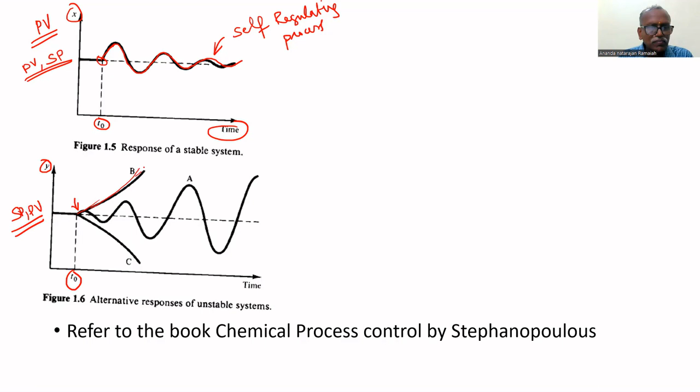On the other hand, here also the process variable is y. Here also the set point and PV are together initially up to T naught. At T naught, some disturbance is entering into the process. That's why process B completely deviates. It doesn't come back. The process variable monotonically increases after the disturbance. Process C monotonically decreases as soon as the disturbance entered into the process.

The third one is process A. Because of the disturbance at T naught, its amplitude becomes oscillatory and it becomes an unbounded oscillation. Its magnitude goes on increasing. But all the three cases are unstable processes. It never returns to its original state.

Here, the self-regulating process is like a Tanjore doll. If you tilt that doll, again it comes to vertical position automatically. Like that, for any disturbance, the process comes to its original state after some time. That is called the self-regulating process. If a process is self-regulating, then there is no need to have any controller.

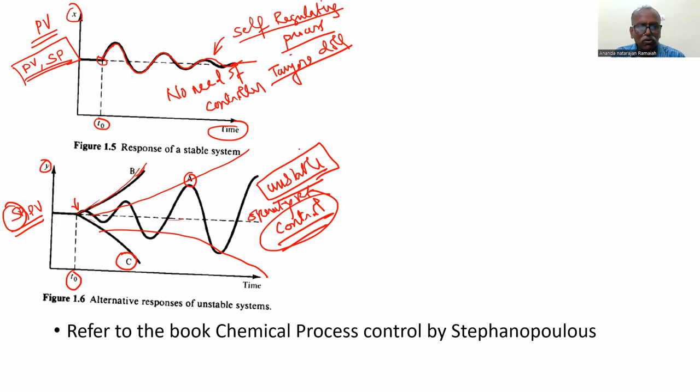But on the other hand, if for any disturbance it becomes unstable, you need a controller to bring back the process to its stable operating point. This dotted line is the operating point. To bring back the process to its operating point, you need a controller. That is the need for controller. This is the second case.

The third case is this. It is a CSTR, continuously stirred tank reactor. In that CSTR, it is an exothermic process. The feed is entering at a flow rate of F. That is the reactant entering the process at an inlet temperature of Ti. Its inlet concentration is C suffix AI. It is an exothermic process. The reactant will react here. Because of that, it will generate heat.

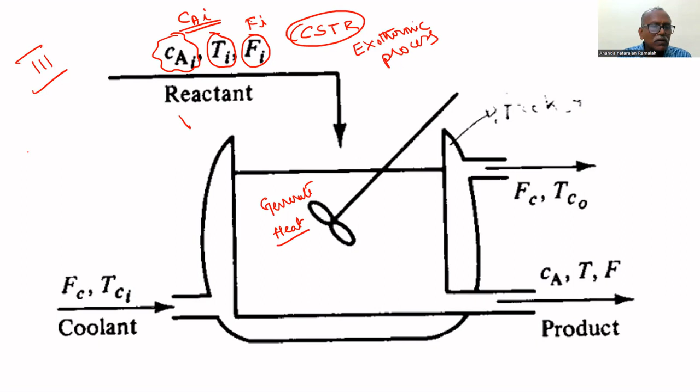I think you know, heat is different from temperature. Heat is energy. It is in joules or watt second, whatever. Temperature is a gradient of energy. For a fixed amount of mass, if temperature increases, the energy content increases. It is a gradient. In electrical analogy, it's identical to voltage.

So it generates heat energy that has to be removed. It is like in a car, the engine generates heat. It has to be removed. That's why we are having a radiator. Initially the car is at cold temperature. As you ride the car, the temperature gradually increases and it becomes steady. It means the amount of heat generated by the engine is equal to the amount of heat removed by the radiator.

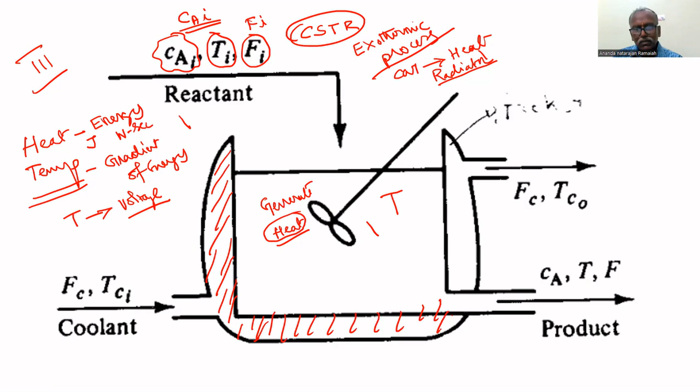This is the jacket around the reactor. A coolant is used. A typical coolant is cold water that is entering at the flow rate of Fc. Its inlet temperature is Tci, and it is leaving here at the same flow rate Fc, and it takes away the heat. That's why its temperature is increased to Tco.

As it removes the heat from the process, the process temperature is maintained at T. That's why the process liquid, the finished product, is leaving the CSTR at the temperature of T with a flow rate of F with a concentration of Ca. So this is the description of the process.

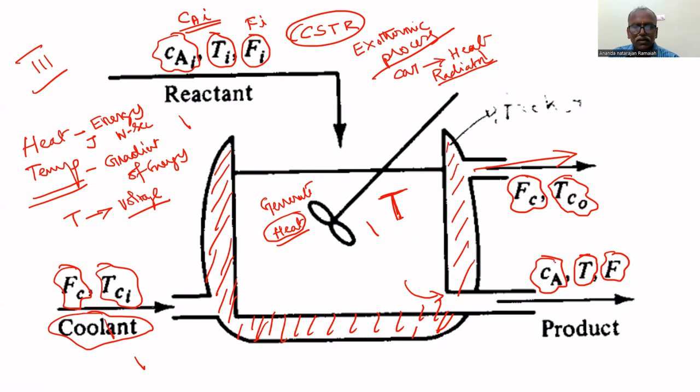The product is available at the bottom. Reactant is entering in the top. Heat is removed by the coolant. A stirrer is used to keep the temperature uniform around the entire CSTR. This is the stirrer. That's all. This is the process.

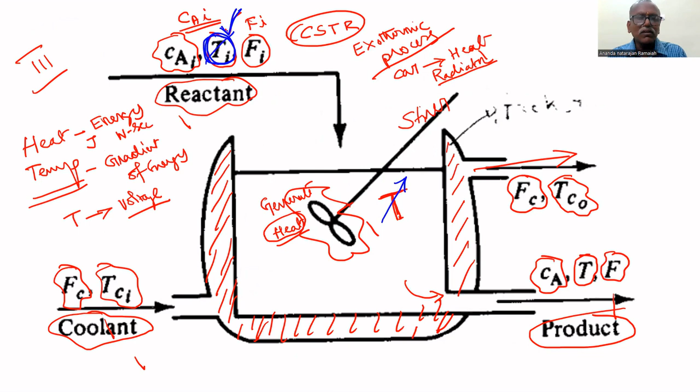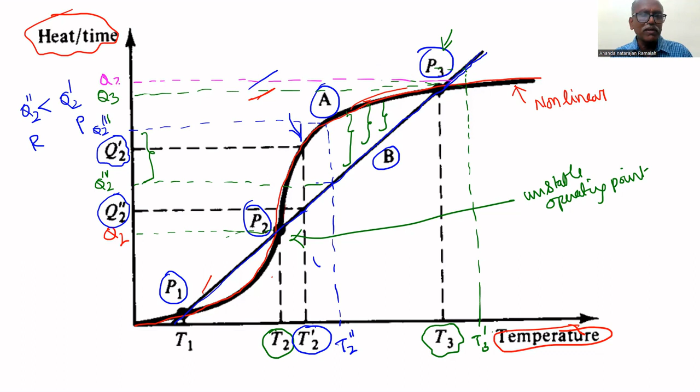That time, the amount of heat generated by the process is Q3 dash. Amount of heat produced by the process is Q3 dash. Amount of heat removed by the coolant is Q3 double dash. Here, Q3 dash is less than Q3 double dash. Produced is lesser, removal is more. That's why the temperature will decrease and come to again P3. It forces the process towards operating point P3. That is called self-regulating.

Self-regulating operating point. It regulates itself. If any increase, it decreases. What will happen if Ti decreases at that point? There will be a decrease in temperature, that is T3 double dash. If temperature decreases, the produced heat is higher, removed heat is lesser. That's why there will be increase in temperature and it goes to P3.

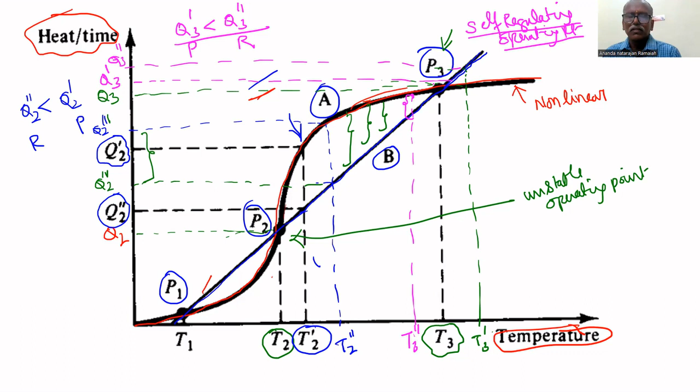If it comes to the left-hand side, it will be forced to the right-hand side. If it goes to the right-hand side, it is forced to come to the left-hand side. That's why this operating point P3 is called self-regulating operating point. It remains at P3. The process regulates itself. We'll check in the other way. Initially it is at the operating point P2. The temperature is T2. That time, the amount of heat produced by the process is Q2.

That time, there is a decrease in Ti. That's why the process temperature will decrease to T2 double dash. What happens? There is a huge difference in heat generated and removal. Removal is higher than generated. That's why there will be a further decrease in temperature till it reaches P1. At P1, again, the amount of heat generated is equal to amount of heat removed.

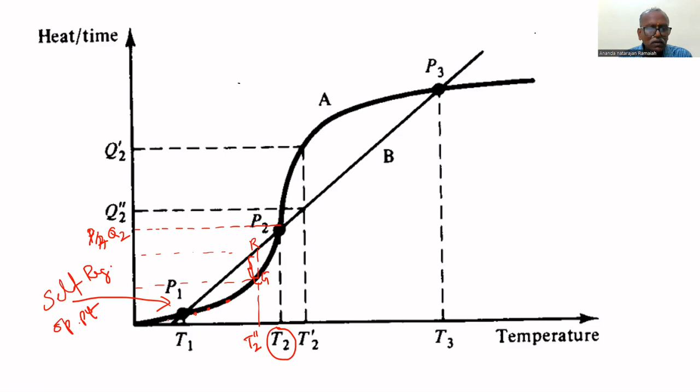For any decrease in inlet temperature, its temperature will fall and automatically it comes to P1 and remains at P1. Here, P1 is also a self-regulating operating point. What happens here? Let us assume that at P1 there is a slight further decrease in inlet temperature. There will be a decrease in temperature. But the amount of heat produced is higher and the amount of heat removal is lesser. That's why the temperature will increase and go to P1.

On the other hand, if any increase in Ti, the temperature of the process becomes T1 dash. Here you notice that the amount of heat removal is higher, generated heat is less. That's why its temperature will decrease and come to P1. If it moves to the right, it is forced to the left side. If it goes to the left, it will be forced to the right. Therefore, P1 is the self-regulating operating point.

So we can say this way. If we try to operate at P2, for any disturbance entered into the process, it will either go to P3 or go to P1, depending upon the disturbance. It never stays at P2. That's why P2 is the unstable operating point.

But if you operate at P1 or P3, there is no need of a controller because it is a self-regulating process. But if you operate at P1, it's at less temperature. That's why the production yield will be very less. That's why it is not economical.

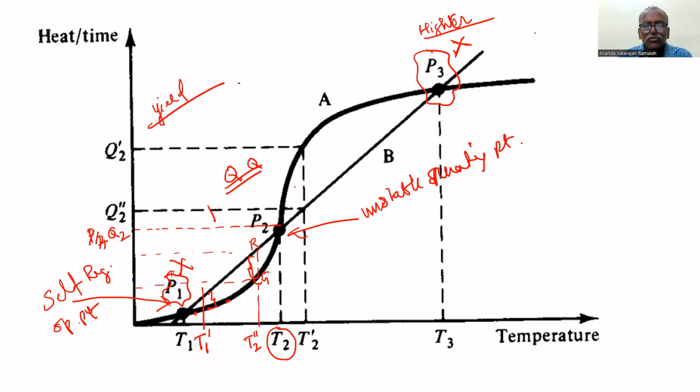But if any disturbance enters, P2 drives to P1 or P3. That's why we need a controller. We need a controller to keep the process variable at T2. That's why a controller is required.

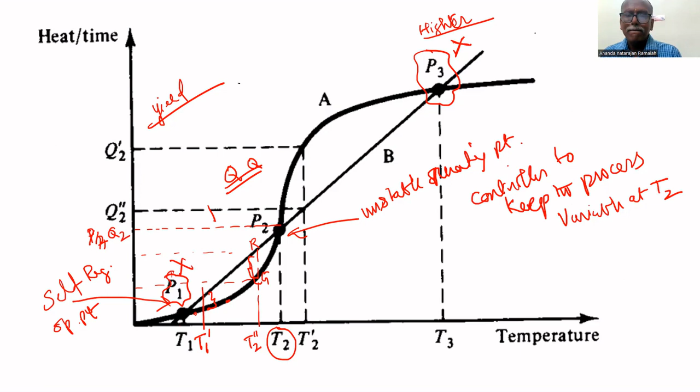Here, initially the process is at T2. At T1, some disturbance is entering into the process, that is Ti increases. That's why the process deviates from T2 and settles at T3, because T3 is the self-regulating operating point. On the other hand, if you operate at T2 and a disturbance enters the process, that is Ti decreases, the temperature decreases and finally it will settle at T1.

Since T1 is the self-regulating operating point. If any disturbance happens at T2, either it will go to T3 or it will go to T1. But if you operate at T3, for any increase in temperature, the process itself forces the process back to its nominal operating point T3. Any deviation forces the process to come back to T3. That's why T3 is called a self-regulating process.

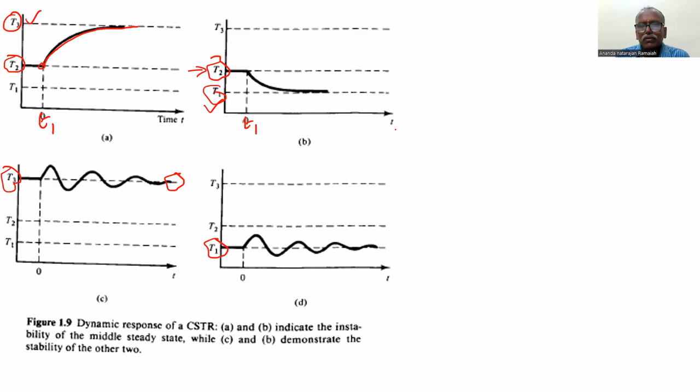Similarly, T1 is also a self-regulating process. If you want to operate other than T1 and T3, we need a controller that will force the process to keep at T2.

Another example of a self-regulating process. Consider a level process without any controller. The inflow rate is Qi, so many liters per hour. The outflow rate is so many liters per hour. The level in the tank is H. Suppose there is a sudden increase in inflow rate. What will happen? The level will increase. But Q naught is a function of H: Q naught equals B times root H, or Q naught equals a constant B times square root H.

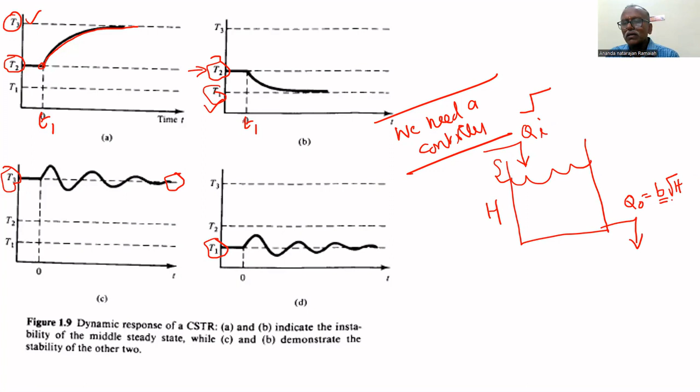Therefore, if H increases, Q naught also will increase. If Qi increases, H will increase. In turn, Q naught will increase. As Q naught increases, its level will decrease. Q naught increases because the level increases, until Q naught becomes equal to Qi, and then the level becomes constant.

So what is happening here? If the inflow rate increases, the process raises its level from the present level to a higher level, so that the inflow rate equals the outflow rate. So it is also an example of a self-regulating process. The self-regulating process here can be used to damp out any sudden changes in the inflow rate Qi.

If there is any sudden change in the inflow rate and it is directly given to the next process, suppose unit 1 is here and unit 2 is here. Unit 1 gives Qi, which has to be given to unit 2. But if you directly connect them, a sudden change in the flow rate Qi will affect the quality of Q2. If you put a level process in between these two,